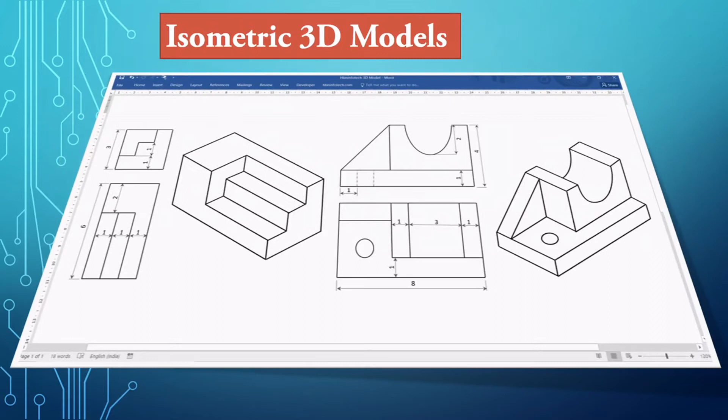In this tutorial you will learn how to create a diamond grid, an isometric grid, mechanical 3D models, 2D and 3D isometric maps. Since this tutorial video covers different topics, do not skip any part of the video.

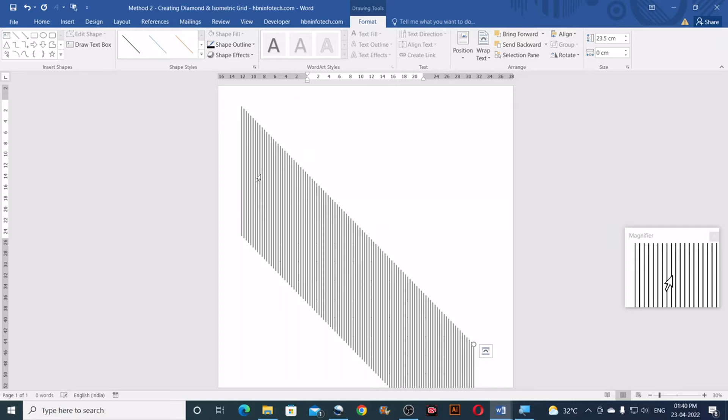Okay, I have made 100 copies of these lines, and now I will need to select all the lines. There are different ways to select multiple objects or shapes in Microsoft Word.

The first method is that you can click and select the first shape, then hold down the shift key on your keyboard and click and select the second shape or object. Just like this, hold down the shift key and keep clicking on the other shapes so you can select multiple objects.

Now the second method would be using the select objects feature. This is available in the home tab, select, and select objects. Using this, you get a plain arrow. You can draw a selection box just like this.

Now if you are using 2010 or later versions, this option might not work. So there is a workaround for this. I'll explain it in a moment.

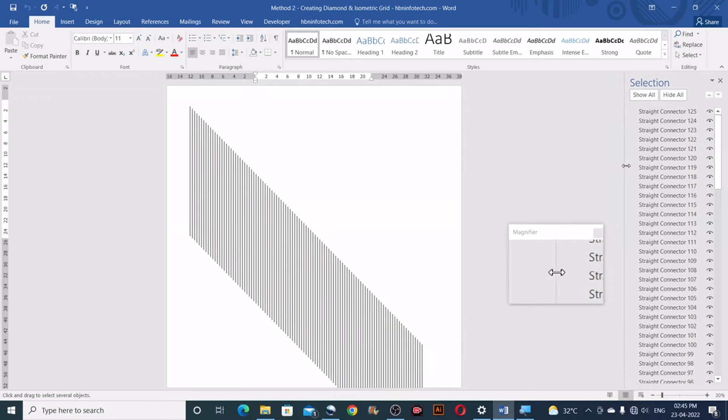Now let us see the next option: using the selection pane. Using the selection pane, you can also select multiple objects. All you need to do is click the shapes here, hold the Control key, and click on the shapes listed here, one by one. This also selects multiple shapes.

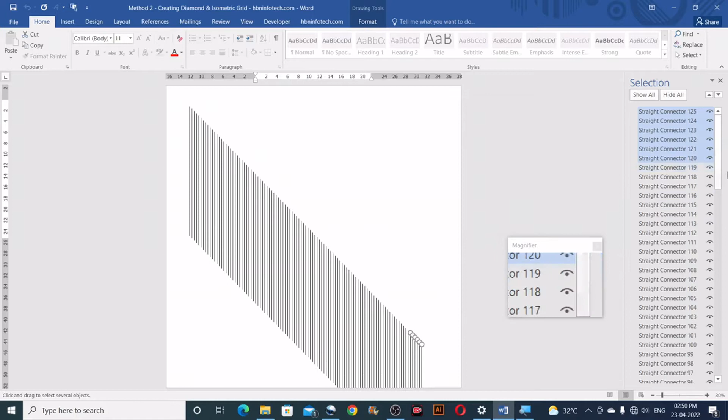Since clicking and selecting these shapes is time consuming, I'll show you a quick and easy method. Go to the file menu, click on save as, and save this file to the old Word 97-2003 document format. What happens is, if you save this, the document will be saved in compatibility mode.

So you get all the old Microsoft Word features, and now this option will work. You can go to select objects, draw a selection box, and select multiple objects.

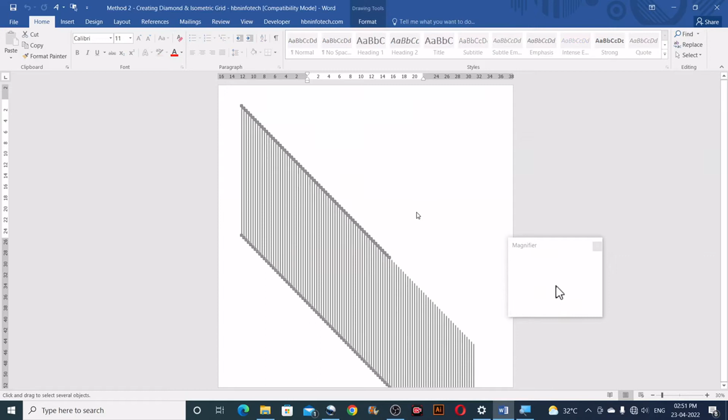Now you can see we are able to select multiple objects easily. There are some objects out of selection. Let me try the selection box once again. I am able to select only till here because these lines are out of the page.

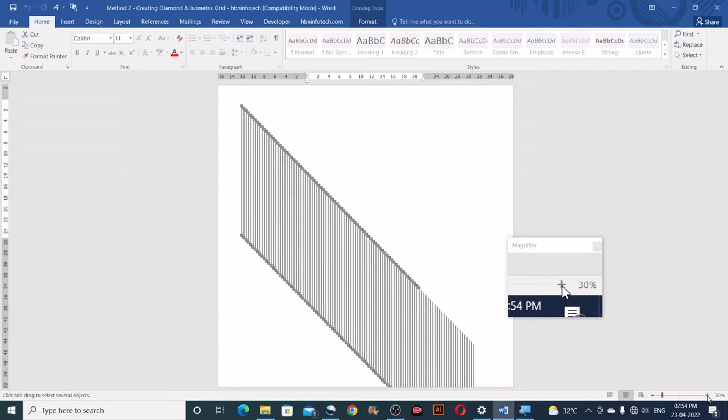Nothing to worry, you can just hold down the shift key and select them as well. I'll just hold down the shift key and click and select all the other lines.

Now once you have selected all the lines, go to format, click on align, and make sure align selected objects is selected, then click on align top.

Now group all of the objects together. Just click on group and click on group once again.

Set the width as 40 centimeters and height as 55 centimeters. Now let me zoom out. So far you should have gotten these vertical lines.

Now rotate this grouped lines to a 60 degree angle, just like this.

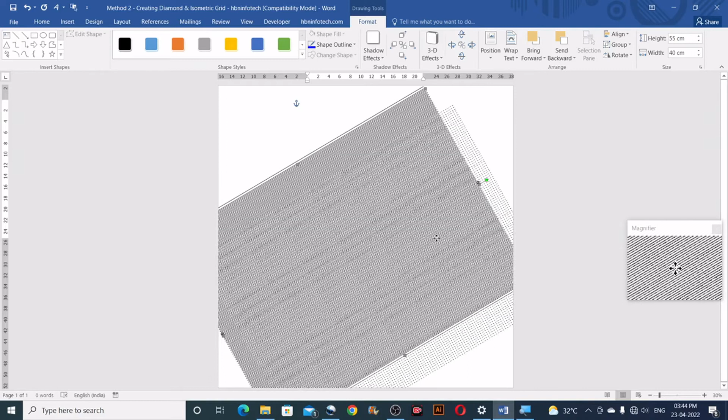Make a copy of this line group by pressing Ctrl D, or you can also do Ctrl C, Ctrl V. Sometimes if you drag, a particular line gets selected out of this shape group, so you need to click outside and reselect it once again.

Then go to format, rotate, and flip horizontal. Now at this point if you zoom in, you could see that the diamond grid is created. Now only one last thing is left to create the isometric grid.

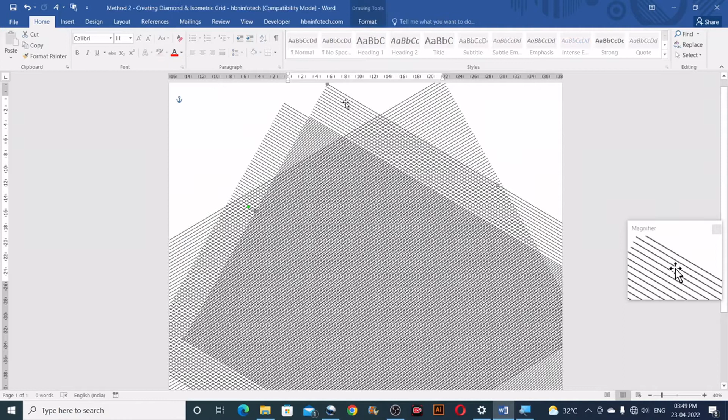So all you need to do is make one more duplicate copy of this line group. I will deselect and reselect, press Ctrl D to get a duplicate copy, click outside, reselect this, then go to format, rotate this to 90 degrees, just like this.

Now you could see that this helps us create an isometric grid, but before that we will need to align these shape groups together. To do that, you will need to click and select all 3 shape groups by holding the shift key. So I have selected all 3 shape groups. Then I will go to format, align, and this time choose align to page, align center, and then align middle.

Now still there is one last thing left. Group these 3 shape groups as one single group. You can go to format, group, and group. So now you can see that this moves as one single object.

Now the next thing is you can copy this by right click on copy. Now open up a new file. This can be a smaller size than the page size we created, so let us say this can be A4 size.

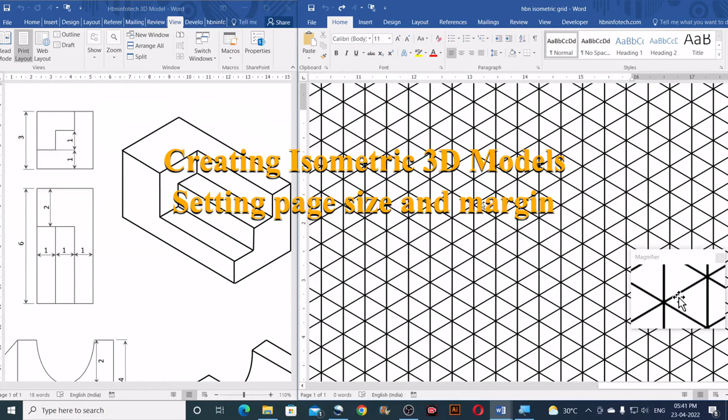Now let us see how to create isometric 3D models. First, I will need to change the grid lines color. So I'll just click on this grid lines, go to format, shape outline, and select the color that you want.

Then I can use the lines to create the 3D model. So now I can take this line, draw along the grid. Now let me draw a simple cube. I'll start drawing from this point to this point, just like this.

If something has gone wrong, you can undo the action immediately.

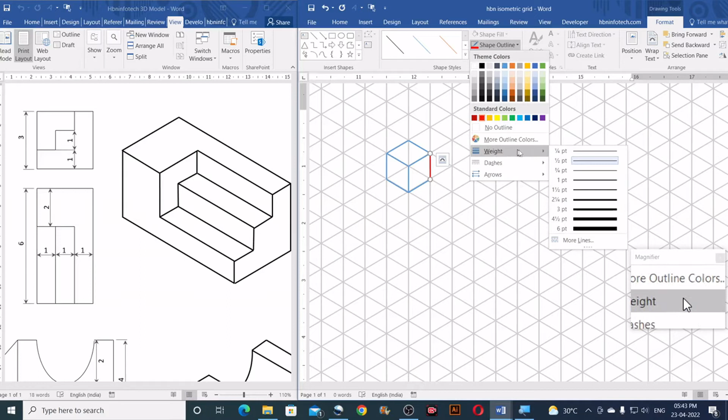Now in case if you want to change the outline color, you can just go to shape outline and choose the outline color. If you want to increase the thickness, you can do it by going to weight and then choose the outline thickness that you wish.

Now in case if you want to apply this outline thickness to other lines as well, you will need to select this line, go to the home tab, double click on the format painter, and click on other lines. Just like this.

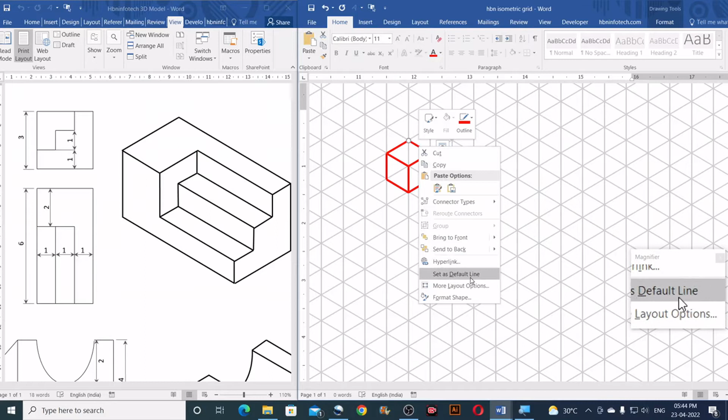Now in case if you want to make this line style the default line color, what you can do is right click on this and then select set as default line. This will make this line color and line style default. Now if you create a new line, you should see that the line color and line style is changed by default.

So now let us try a different 3D model. Now I'll go to insert, shapes, line.

Now you can see the measurement from here. So this is 3 units. I'll start from here, 3 units down, and then again 3 units this side.

Once you have selected a shape or a line, you get the format tab, and you get the line option here itself. You don't have to go to insert again and again. You can take it from here and draw the line, along the grid line.

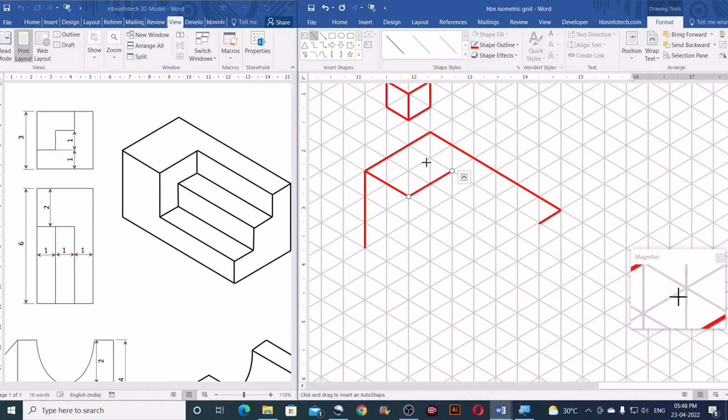So now this is 6 units. I can just draw from here 2, 3, 4, 5, 6, and this is 1 unit. Then from here it is 2 units. Then again this is 2 units, and here I can complete this.

Now again from here this is 2 units, then this is 1 unit, 1 unit, 1 unit, and 1 unit.

Now from here it is 1 unit, then this is 6 units, 4, 5, 6.

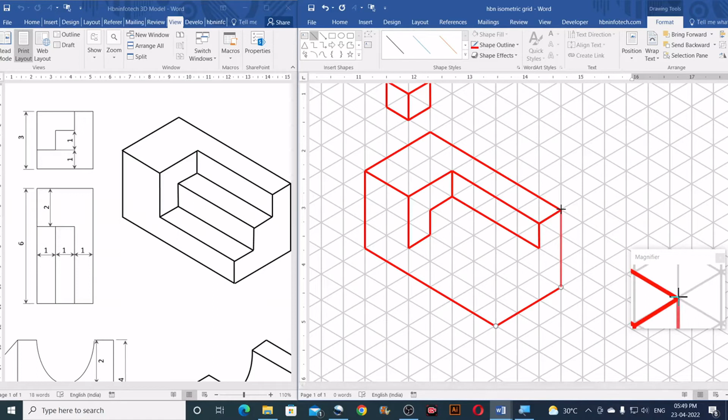See, this is not a sophisticated 3D software, and you cannot expect 100% accuracy, but we can try up to 90%. Now I'll finish this.

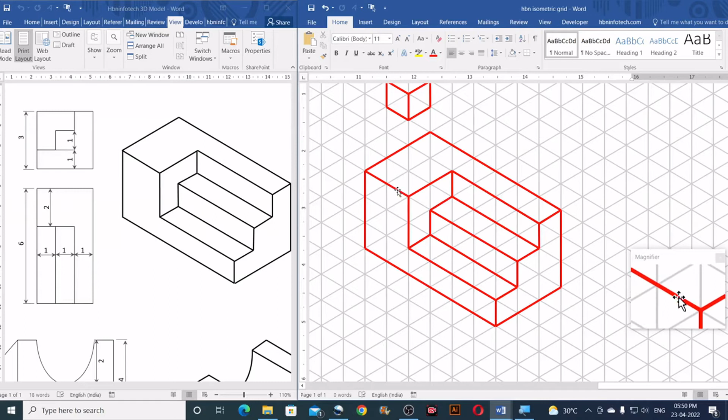So this grid line has helped us draw the 3D model quickly and easily. Now if you want to separate the 3D model from the grid line, you can just go to the home tab, and you will need to take the selection pane.

Here you could see the object group. This object group is actually this grid line. So if you turn off the eye, you can see that it's hidden.

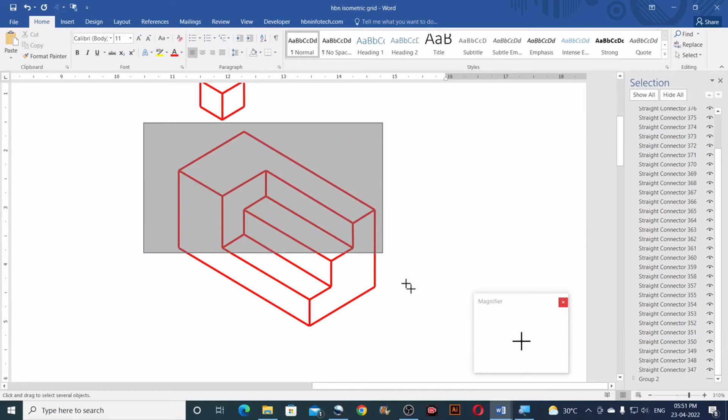Now we can group this, select and group this as 1 unit. You can take the select objects, select all of these lines, go to the format, and then group. So now it's easy.

So when you have the grid lines as a separate group, and you have the selection pane, it's easier to select different objects and control different objects.

Having too many objects on the selection pane might be confusing, so it's always a good idea to rename the group. Now say this group, we can just turn off the eye for identification and see what it is. I think it's not properly grouped.

Now these lines are not in the group, so we'll just have to include this. We'll need to identify these lines. I'll click on this, click on this and see which line they are. You can just hold down the control and click on all of them just like this.

And then you will also need to select this main group and group it together. I'll go to format, group and group.

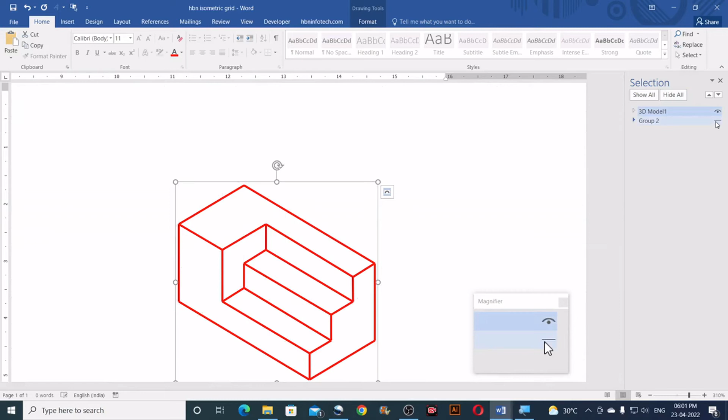Okay, now we have only two groups here. So now I'll just rename this group. You can make a double click here and I'll say 3D model 1, and this group represents the grid. I'll just double click and rename this as grid. So now it's easier for us to identify.

Okay, now let us see how to create ellipses and isocircles for 3D drawings. Normally you will need three kinds of circles here. One is the top circle, other one is the left, and the third one is the right.

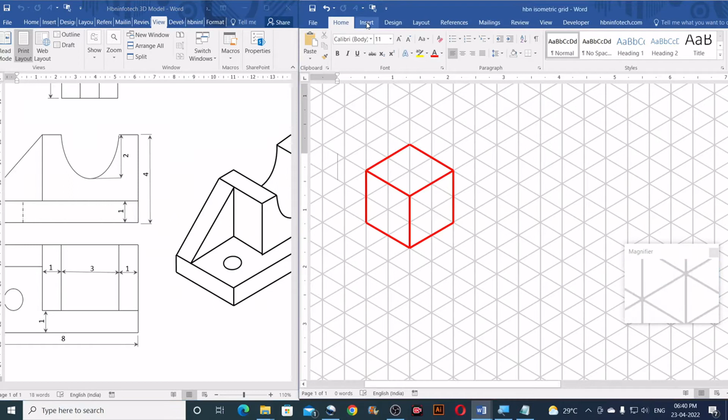So now you can use the ellipse or oval tool, then draw the oval. Now I'll remove the fill, and then there is one trick to do it. To get the top circle, I recommend that you get the top circle first.

So what you can do is you can just draw a circle exactly on this square, on this cube. Then let us stretch the height exactly from here till here, and the width from here till here. Now we have got the perfect ellipse.

Now you can hold down the shift key and resize this according to your requirement, just like this. You can use the arrow keys for fine tuning. Now you can copy this ellipse by pressing Ctrl D.

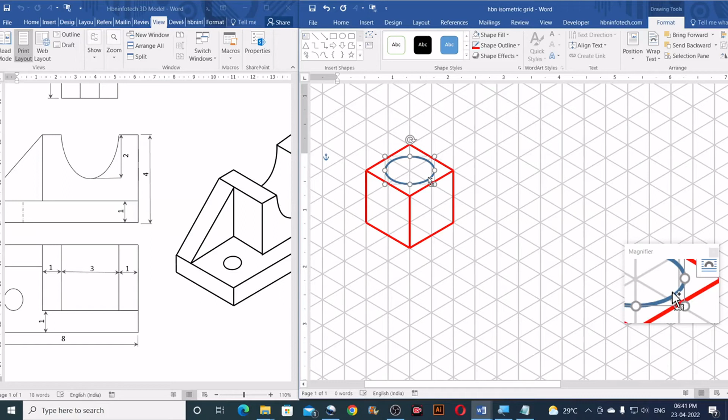Now for the right circle, I am going to rotate this. So I'll just go to the format, rotate, more rotation options, and let me rotate this to 30 degrees and see what happens. Now let us rotate this a little to this side. Now let us check the angle.

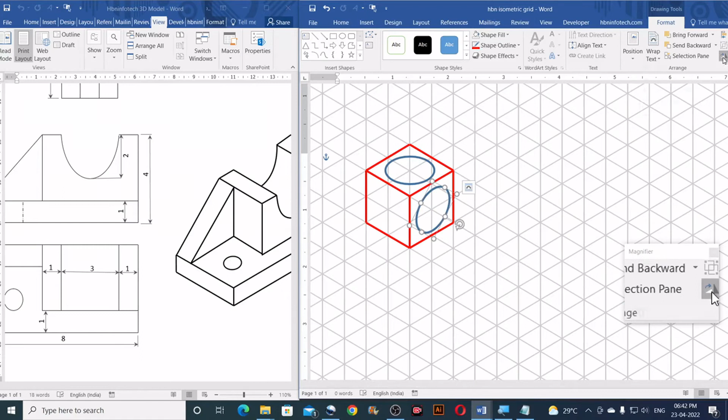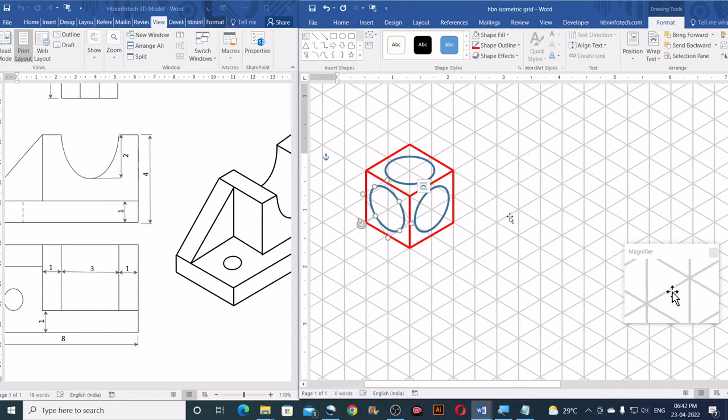Okay, let us make this 120 degrees, that will be ideal. Now you will need to just duplicate this and flip it horizontally, and place it on the other side. So this is how you can create ellipses, 3D isocircles, in Microsoft Word.

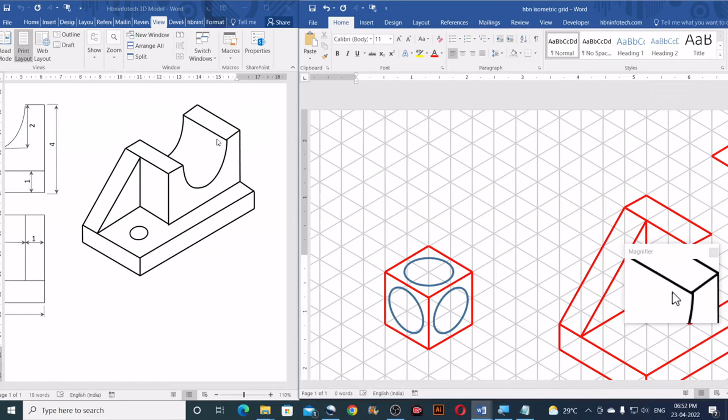Now let us see how to draw elliptical arcs for 3D drawings. First you need to identify which plane the arc lies on. If you look at this arc, it is on the right side, and this ellipse is on the top side. If you correlate this with the cube, you can understand it better. So we can visually identify which side of the plane the ellipse is located on. It's on this plane, so that is the right plane.

Now what you can do is first create a diamond shape like this. You need to identify the position of the ellipse—it starts from here, so the ellipse will be created in this area. Let's roughly create a guide for the ellipse. I think the ellipse needs to be created till here, so I'll just roughly create this line.

So the ellipse needs to come within this area. Now to create the ellipse, you can take the curve tool and just make clicks. This is the starting point—I'll make the first click here, approximately the center position, then the second click here and the third click here. Then press the enter key to end it.

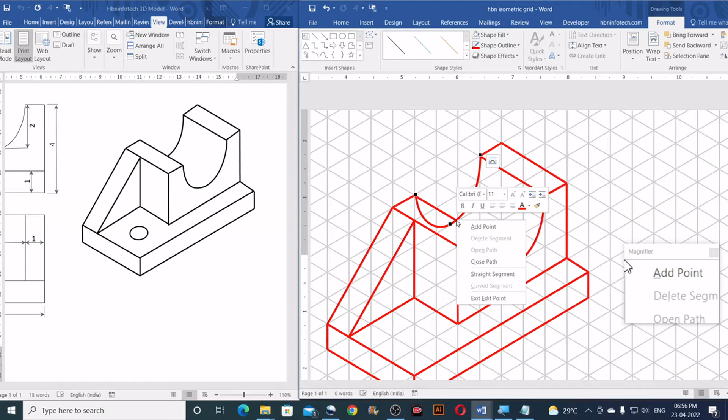But now the challenge is we will need to erase part of the line. To do that, select the arc, go to format, edit shapes, edit points. Now you can see there's an intersection here—right click carefully and click on add point. Now you can delete these points, since they aren't required anymore. Right click, delete point, right click, delete point here as well.

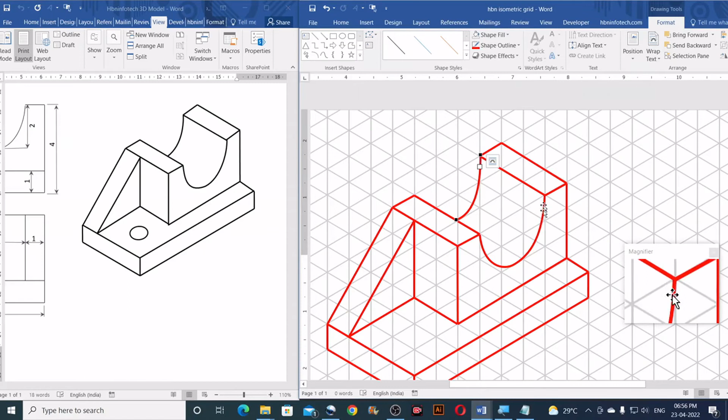Now click on this dot here and adjust it. You'll need to adjust this as well, just like that, making sure it's parallel to the first elliptical arc. I hope you understood how to create ellipses in 3D.

Now let us see how to create flat isometric maps. Let me zoom this a little. I'll need to change the orientation, so I'll go to layout, then orientation, landscape. Let me zoom this as well.

First I'll give you some tips, like you can create the outer structure—these I can consider as the outer structure. On the outer structure you can create the inside layouts, so first you need to create this. Later we can think about the road and the pathway.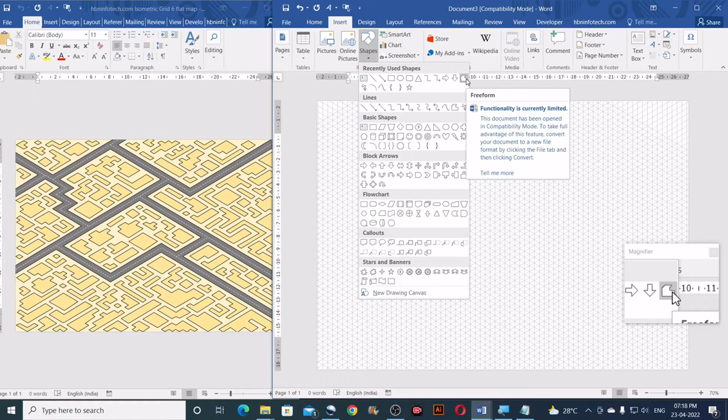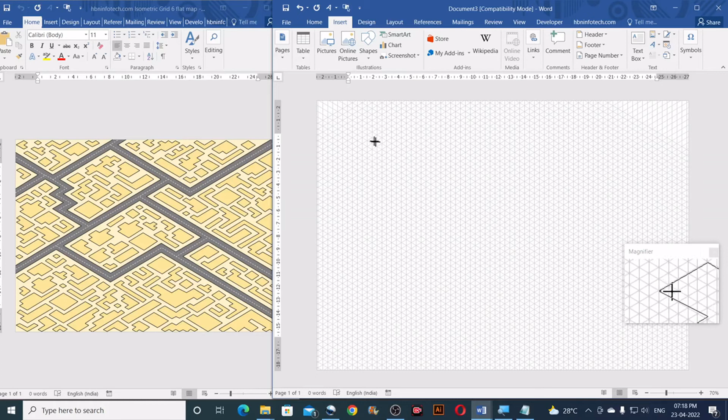You can go to insert, then shapes. This time I'm not going to use a line, instead I'm going to use the freeform line. The reason is, using the freeform line you can fill the region—so if you're starting from here, you click on the other point, then another point, and continue clicking like this, then end it where you started. This helps you fill the region just like this.

So the same strategy we will use to create the outer regions. Initially I will set this to no fill because I need to see the grid lines. Let me zoom it a little more.

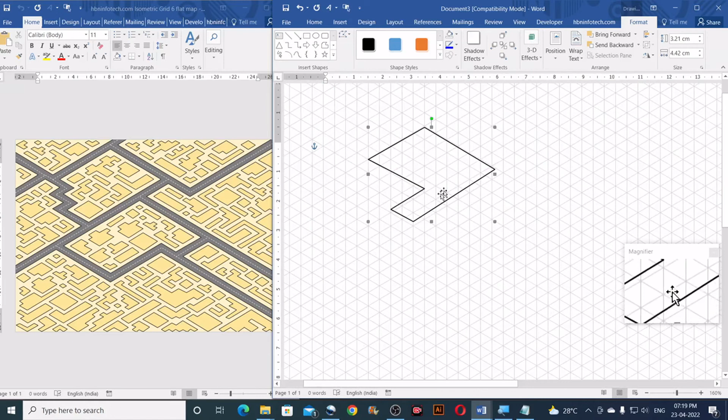You can also edit the points and place them exactly where you want, just like this. You need to make sure you're creating the lines along the grid line.

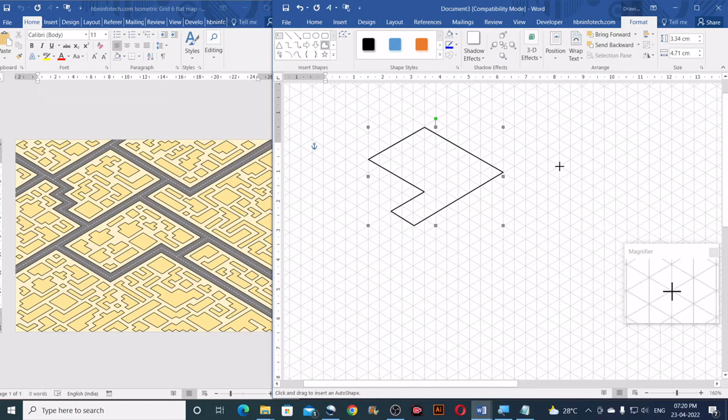Once you've created the layouts like this, let me create 2-3 more layouts. If you want a gap here, a road or pathway or something, you see I've just left two diamonds here. So I'll start from here and create another region.

Now 2 regions have been created. I'll set the fill to no fill. Now let us create the inside regions, so I'll use the same freeform tool.

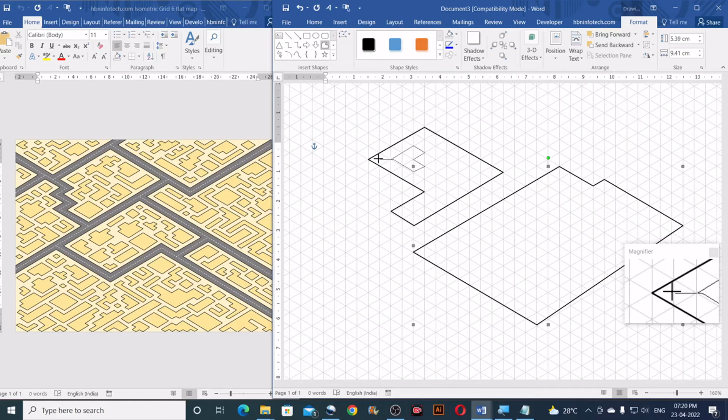If you have gone wrong, you can press backspace and then click it once again. Now I'll choose a fill, I'll use this color, and let me create it.

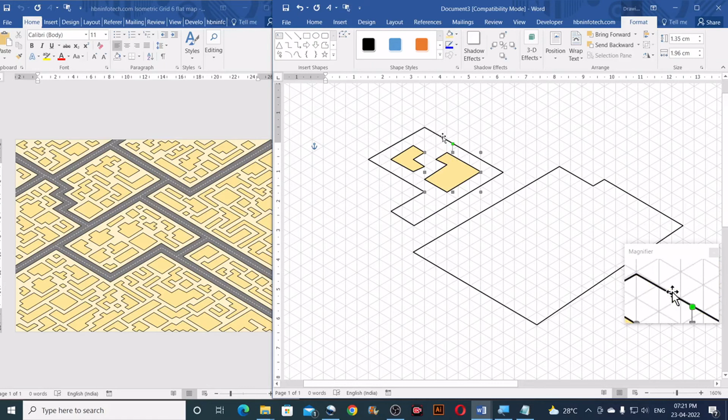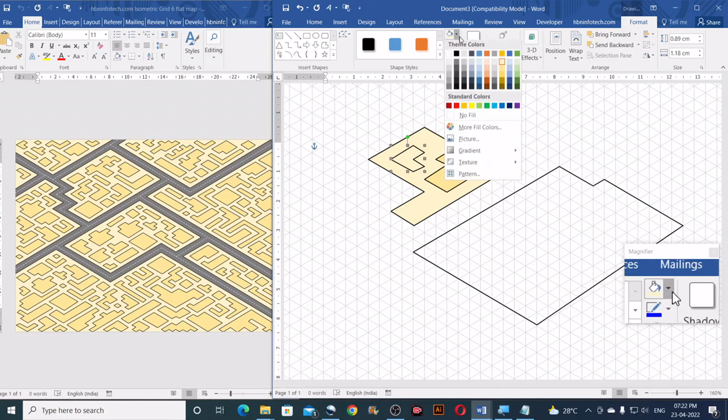I'll fill this again with this color. Now it's time to fill the complete area, so I'll choose another color for this. I think this is okay. Sorry, I'll choose the lightest for this and then a little darker for this, like that.

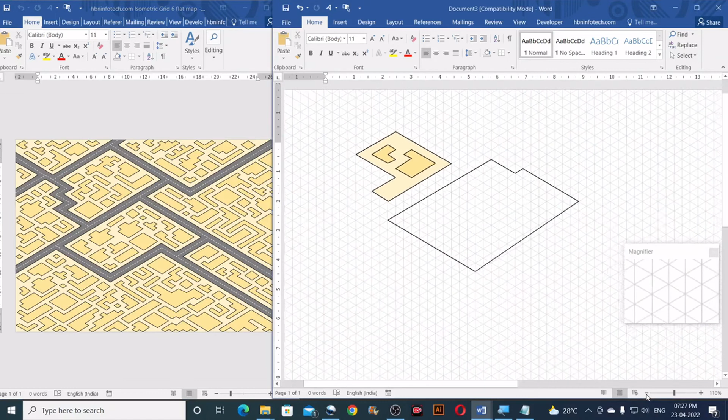Now let us see how to create a region like this, that is going out of the page area. I guess the region is from here, so let me zoom this out so that you can see the entire page.

Now I'll take the freeform tool and start from here. You cannot click outside and start, but you can start from inside just like this, and then click outside, so that happens, and then you can keep clicking and come back and click here where you started. This is how you can create regions that go outside the page boundaries.

Later you can use the edit points, but remember that the points which are inside the page can be edited; the points which are outside cannot be edited. So now this can be edited, I can move this here like that, and here too, if you wish, you can add a point and edit it, drag it. So if you are messed up, you can just delete it and create it once again.

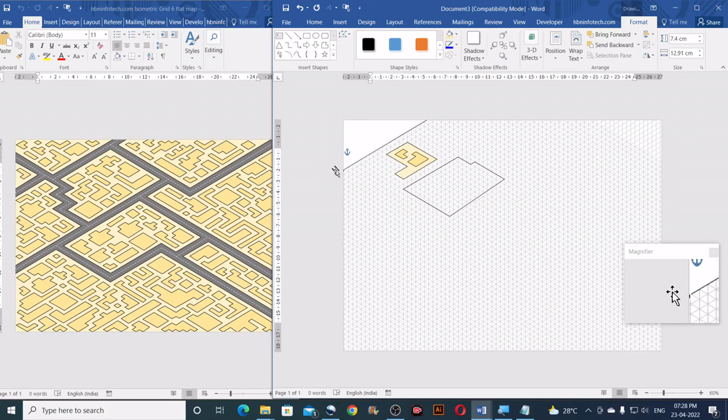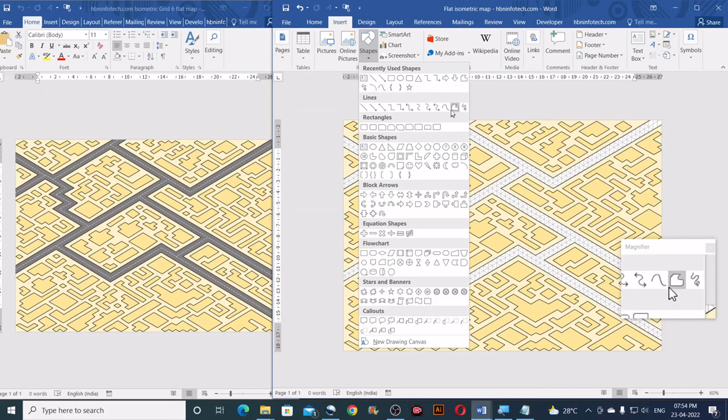Now let us see how to create this roadway or pathway. First you can create this dotted line, and then later we can fill the background. So first I'll go to insert, shapes, and then you can use lines or freeform. If you are using the freeform, make sure that you are not just drawing continuously.

If you draw continuously, you will get a scribbled line like this, so you will need to make clicks. Just like this, you have to keep clicking - first click, then second, and third, like that. So you will need to keep clicking, and then once you're done, press the enter key.

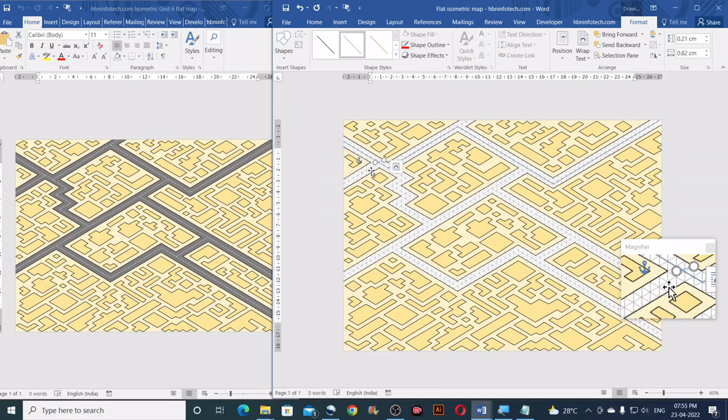If you're using the lines, you can just create lines from here. Sorry, let me maximize this. You can use the lines like this and create all the dotted lines.

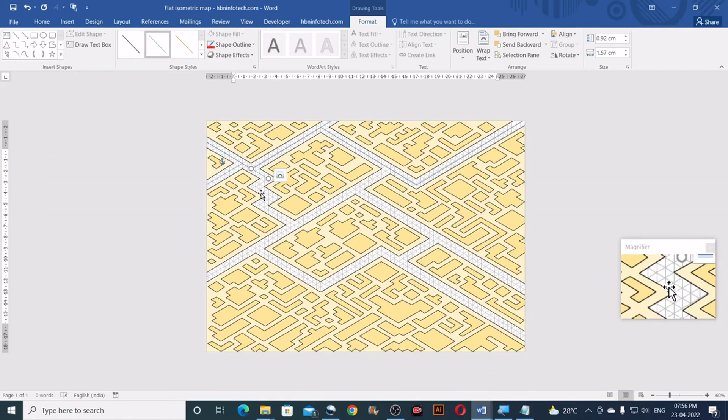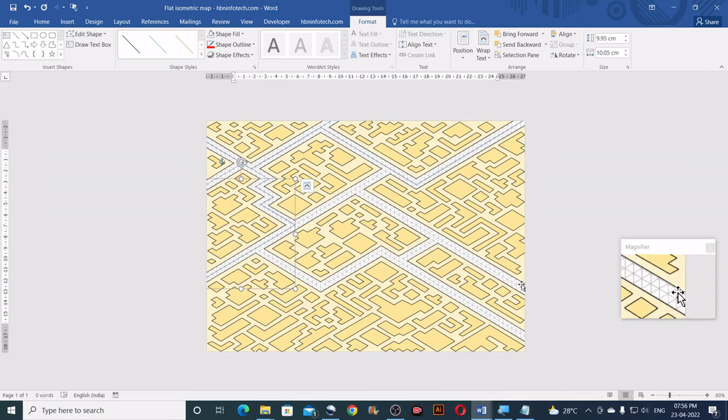If you want to draw continuously, it's better to use the freeform tool, just make clicks. In this way, you will need to create all the lines. Now I am done with all the lines.

Now let me create the background color. To create the background, you can take the rectangle and draw a rectangle, stretch it to the full width, change the color, and then send this behind to all objects, send this to back, and then go to the same option and bring it in front of the grid lines. You can just click on bring forward.

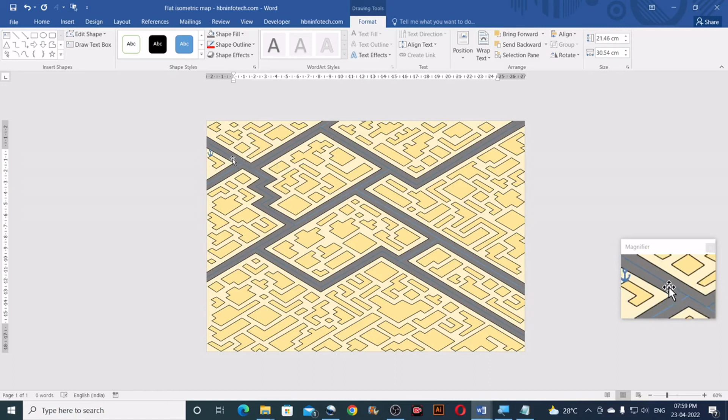Now the next thing is, you will need to make the line appear as dotted lines. So just click on one of the lines and then go to shape outline and choose the desired color, then go again to dashes, and choose the dot style that you want. Now you can just copy this style to all the other lines.

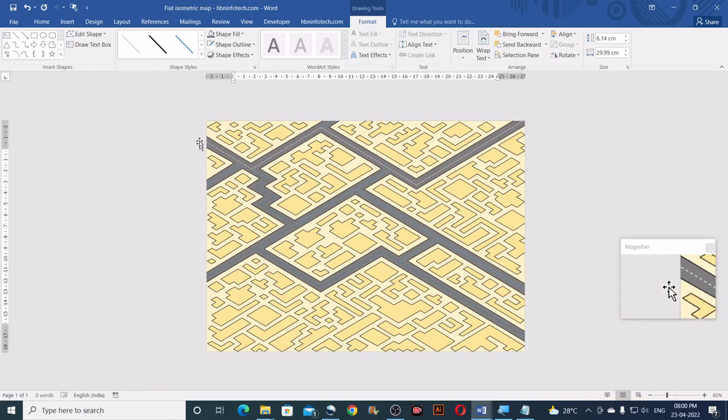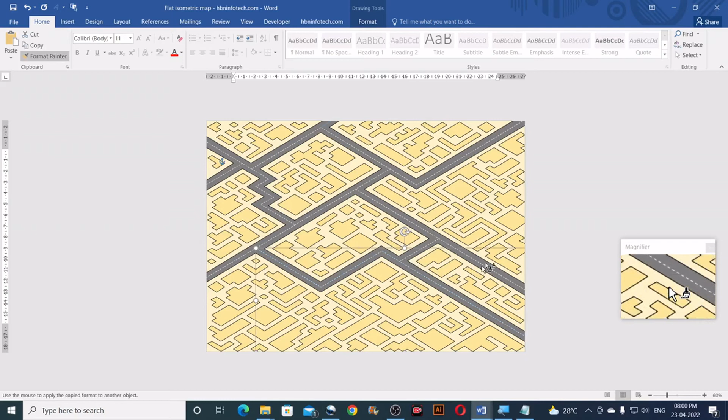You can use the Format Painter, make a double click and then click on other lines, just like this. Once you're done, you have to press the escape key. Now I hope you have understood how to create flat isometric maps.

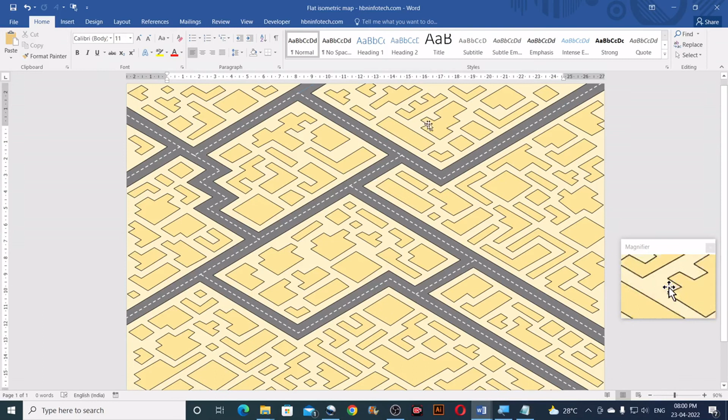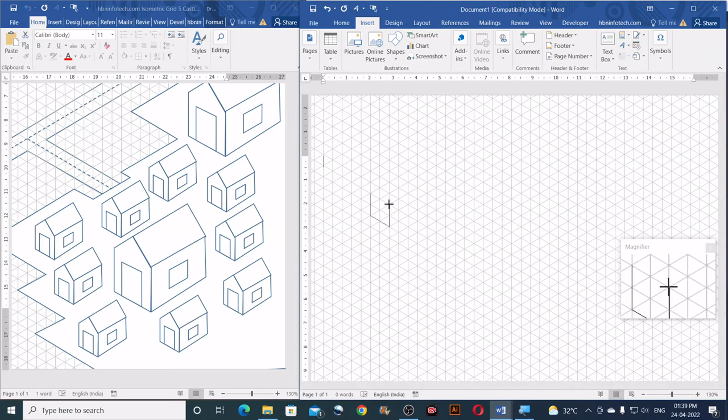Okay, now let us see how to create 3D isometric maps. Let us start with this simple house drawing. Now let me take the freeform tool and say this is 2 units from here, just like this. Just draw along the grid and make sure the lines are parallel.

If you want to create filled shapes, then use the freeform tool instead of lines. If you have gone wrong in the middle of the drawing, use the backspace key to come one step back. If you accidentally move the grid, undo immediately. Now the drawing is created.

To fine-tune this drawing, you can use the edit points. You will need to click on each item here, go to format and edit points, then move the anchor points to the desired location. You can also access the edit points by right clicking on the objects and clicking on edit points. Edit points are not available for the predefined shapes - it's available for the freeform lines and shapes that you have created. If you use these tools, you get the edit points option. So now let me fine tune this one as well.

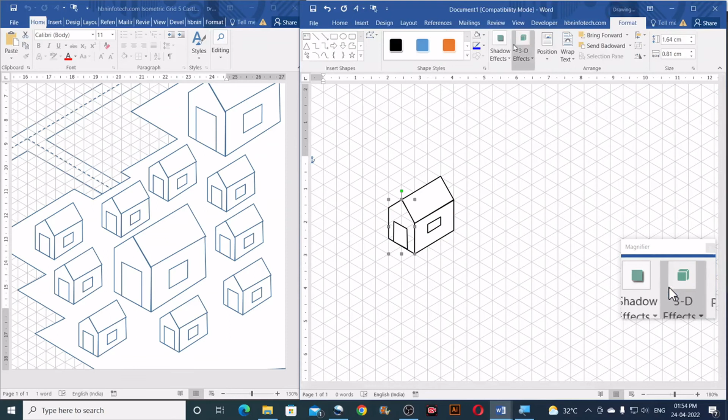Sometimes you might have to remove the fill for a time being so that you could see the grid behind, then make the fine tuning and then again refill it with the color. So let me fill this with a different color.

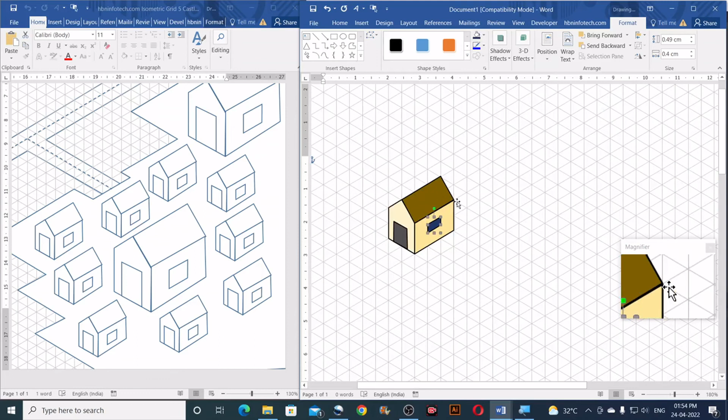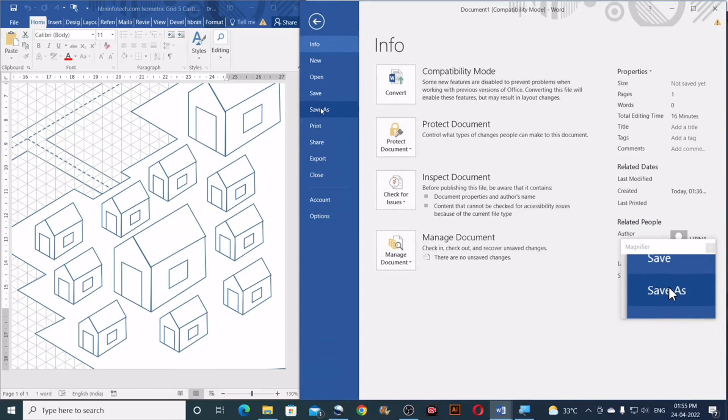Now once you have created a house like this, you can make multiple copies. You need to first group these together. To do that, it's always better to take the selection pane. If it is not available, make sure that your Word document is saved to the latest file format. So I will go to save as and save this. Click OK, now you get the selection pane.

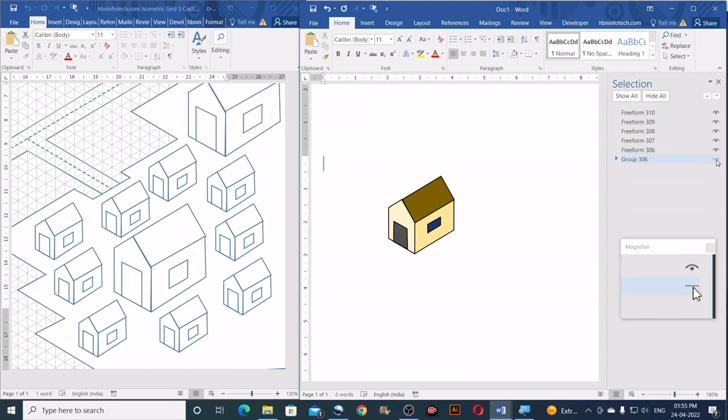So this is the grid layer. I'll just turn off the eye icon. Now I get only this. Select objects, select all the objects and then group it together, and then you can again reveal the grid.

Now you can hold down the control and click and drag to make multiple copies. You can also resize the house as per your choice, so you can create many houses like this.

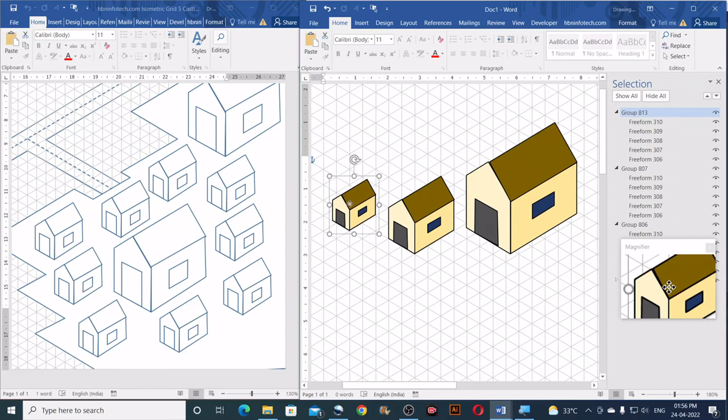Okay, now let us see how to draw arch like 3D shapes. First, if you're drawing an ellipse, I prefer that you create a bounding box first. Now say like this.

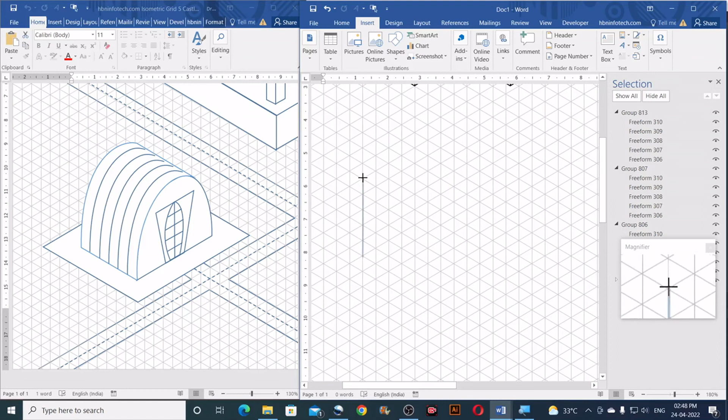I'm using the freeform tool. Now you can take the curve, then say this is the starting point. I'll make one click here, and this is the center point, and this is the end point. Then you will need to press the enter key to end the curve.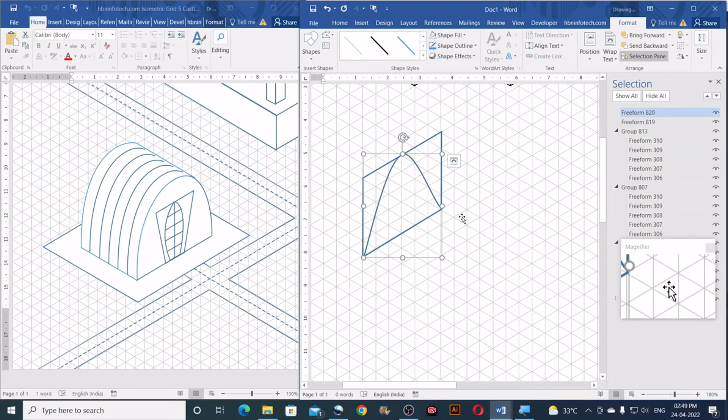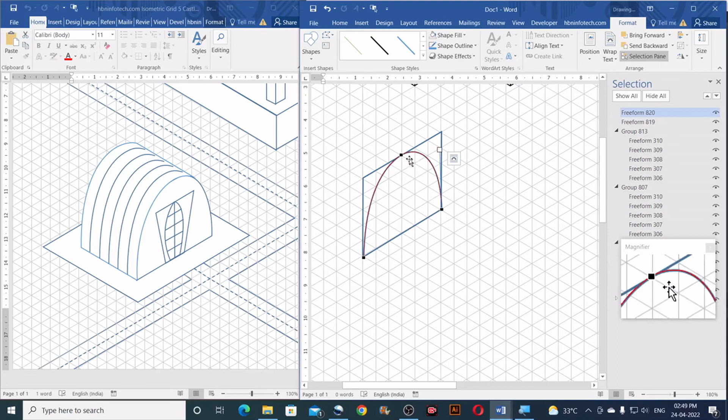Now you will need to use the edit points to edit and make it appear a perfect iso circle or a curve, a 3D elliptical curve. So yeah, I think this looks okay.

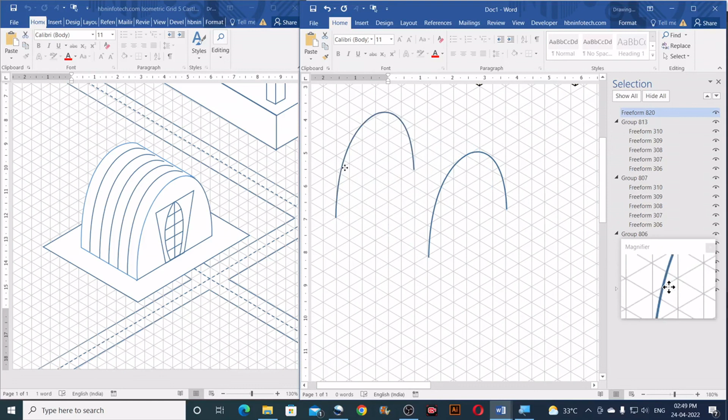Now you can make multiple copies of this, just like this. Make sure that you are copying objects parallelly, and you also make sure that you are on the same grid line. So if this is your tracking grid line, you should make sure that the copied item also stays on the same line.

Now let me use the lines to create a tangent here, and I'll also need to make sure that it's parallel. Now I think you will need to erase this part of the line, so I'll need to right click, edit points, add a point here.

So before adding a point, I think let me make this a corner point, and then I'll add a point here and delete this point. Now adjust this one.

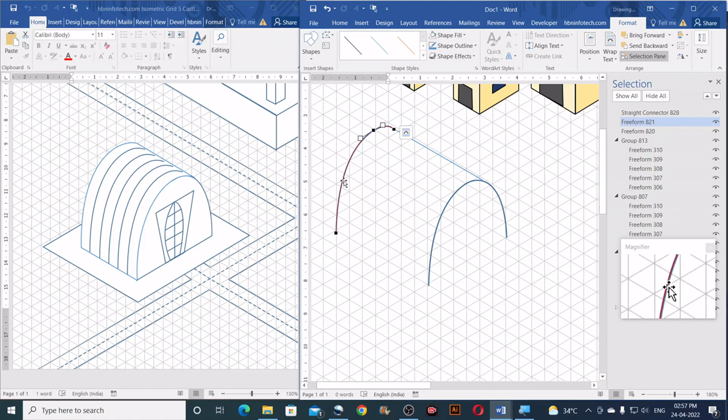Just like that. Now you can make multiple copies of this line. Before doing that, you need to exit the object editing mode - you can press the escape key. Now you can hold down the control button on your keyboard and make multiple copies. You can use your keyboard arrow keys to adjust the position. And finally you can press the escape key.

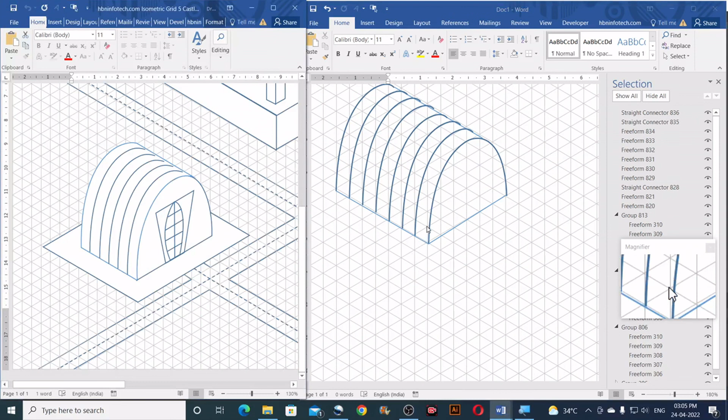Now I'll complete this portion with a line. Okay, now let me finish this 3D drawing.

I'll use the freeform tool at some places. You will need to use the freeform tool in case you want to create continued lines and also want to fill the shapes.

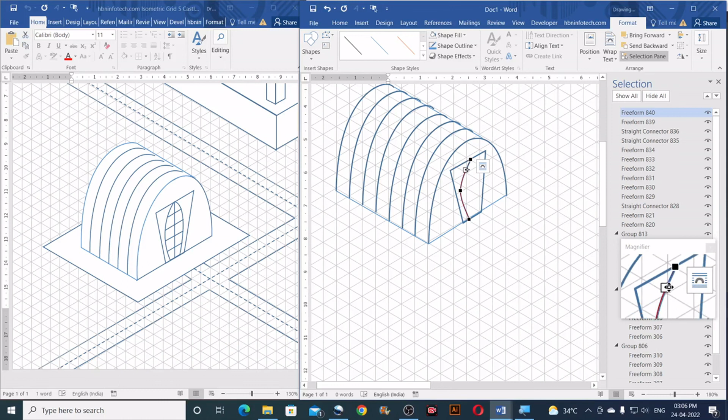Now I'll fill this with - for the time being I'll remove the fill. I'll use the curve here. And then edit points. I'll create one more shape on that side.

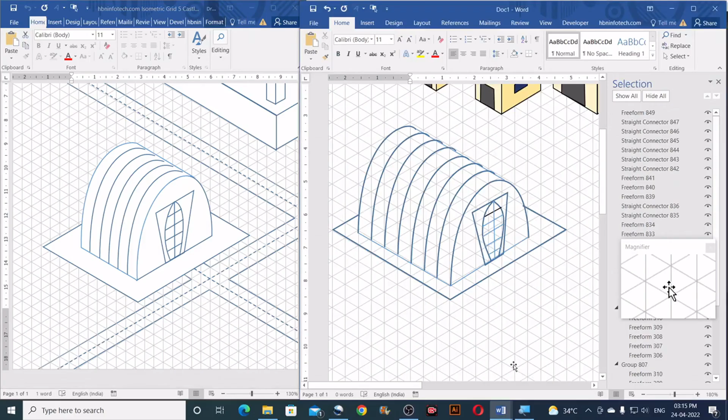Okay, now let us see how to create stacked objects or multi-layered objects like this one. In this case also I'll take the freeform tool. You need to plan it by layer, so which needs to be created first and next, you need to plan properly. So now I'll start from this shape and then this shape, then this one, like that. Let me start from here.

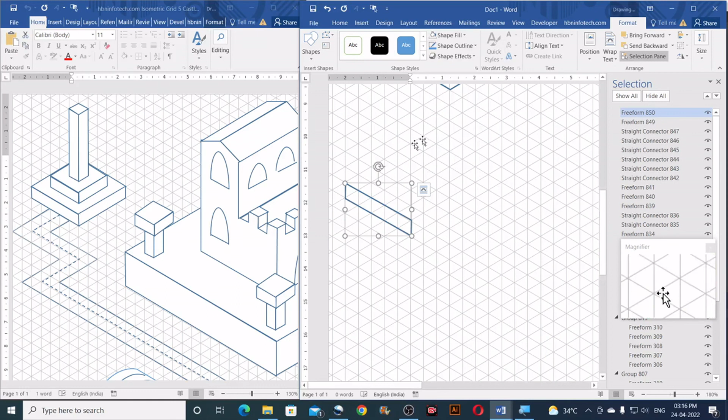See, if you have gone wrong, you can press the backspace and then click again. I'll remove the fill for the time being. Again, remove the fill.

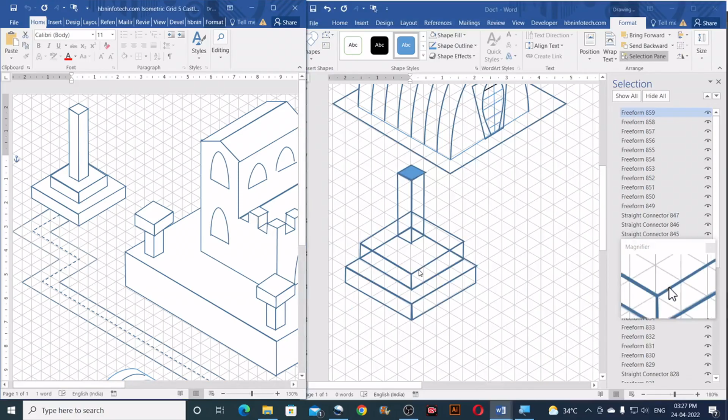Once done, you can start filling up the shapes with the desired color.

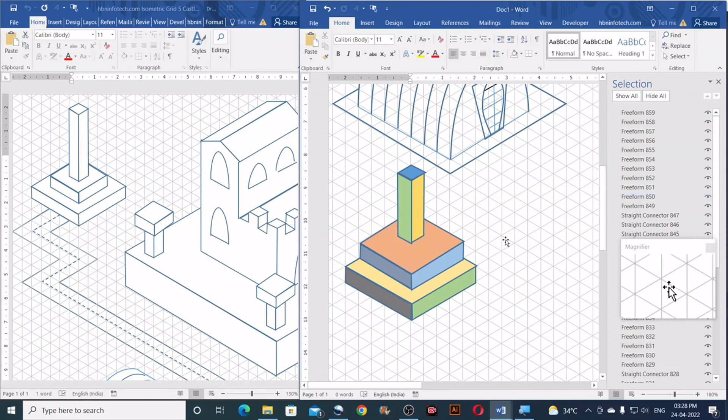Okay, so far we tried to create some shapes. Using similar techniques, I created all of these 3D objects. So I created this castle, I created these buildings and all the stuff. You can learn how to create the pathways from the previous steps. So I guess you got some idea how to create 3D isometric maps.